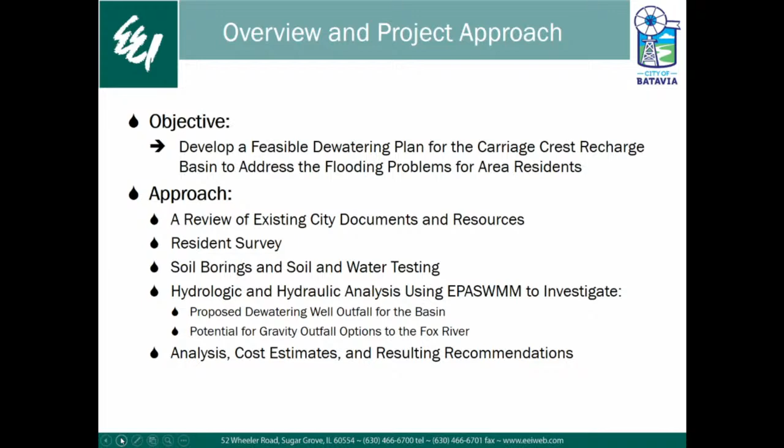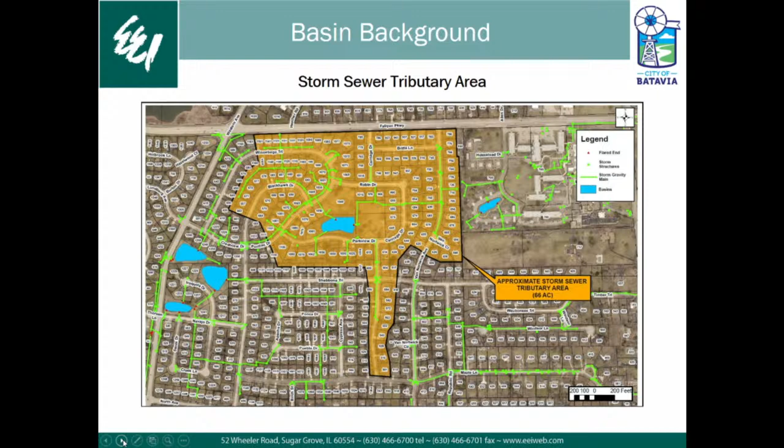A little background on the basin that we learned through the investigation and with the assistance of city staff: there are sand and gravel layers underlying the basin and also within the surrounding soils. The basin was constructed over a former dump site, and there was evidence that there was gravel mining prior to its use as a dump.

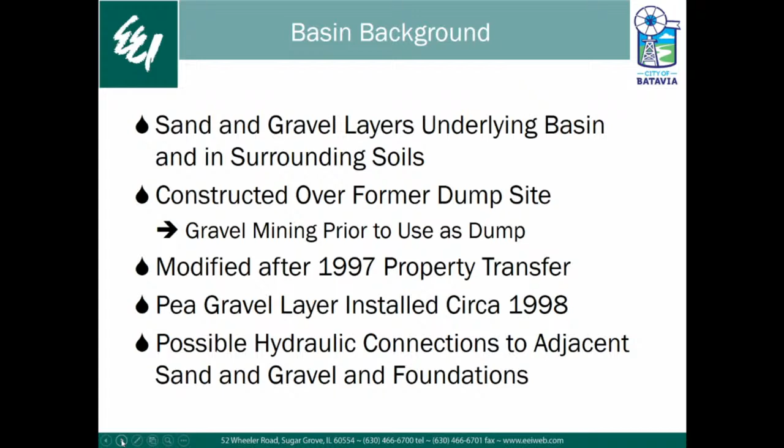The basin was modified after a property transfer in 1997, where an additional lot was added to the subdivision. Then around 1998, after the 1996 storm events, there was a recommendation to add a pea gravel layer just under the surface of the bottom of the basin to help promote infiltration. We've also learned there are possible hydraulic connections to the adjacent sand and gravel layers, and possibly also to foundations and basements.

We took two borings, one in the bottom of the basin, where there was water about 2 feet deep just under the pea gravel layer, indicating possible permeability issues with the dump material underneath it. The other boring, just outside the basin at a possible lift station location, had a thinner layer of dump material and then sand and gravel, but no water. So there's a possibility of some perched water table in the basin area.

For reference, from the plans and survey information, there are a few homes adjacent to the basin, and what we think is the lowest basement floor elevation is about the same elevation as the bottom of the basin. So if there is some connection between the pea gravel and the sand and gravel layers, there could also be a connection to some of the foundations.

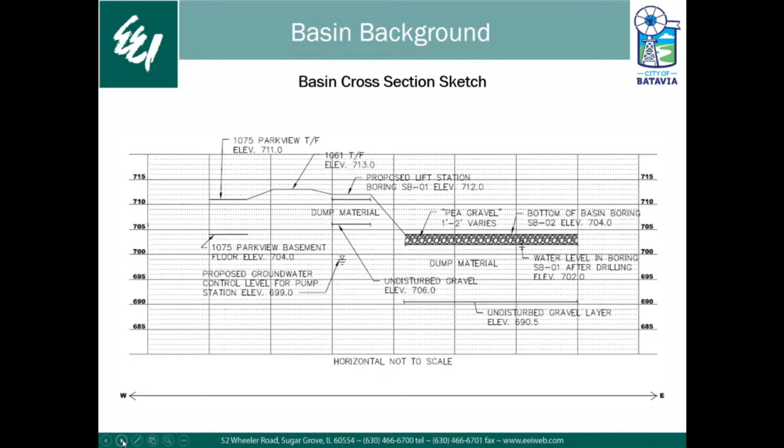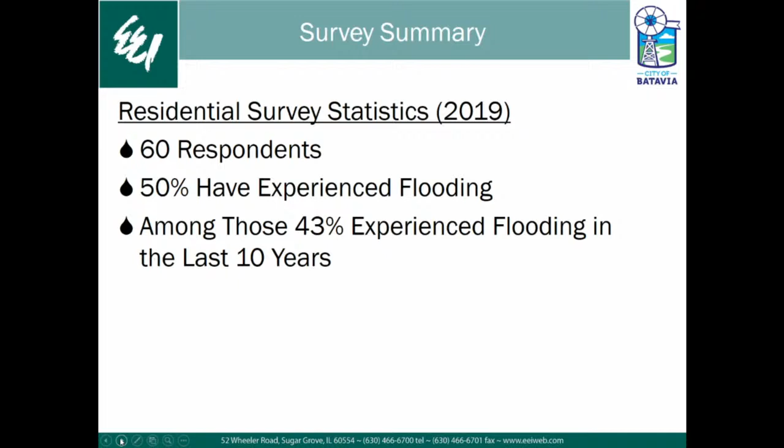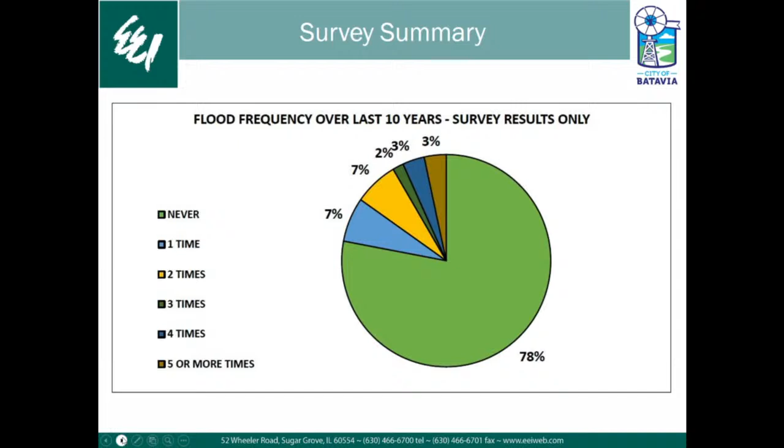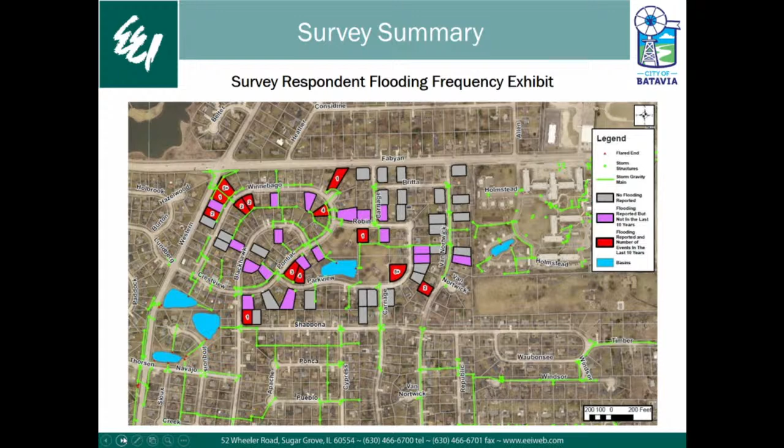Now I'd like to talk about the soil borings we did. We conducted two soil borings, one in the bottom of the basin, in the middle of it, and one where we propose a good location for a lift station if we're pumping stormwater.

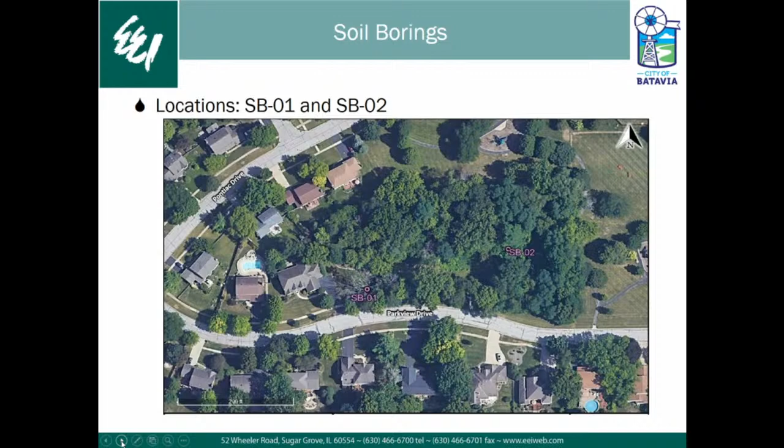Soil boring SB01 was outside of the basin, at the proposed lift station site. Underneath the topsoil there was about 6 feet of dump material, then sand and gravel material. The soils report calls that material suitable for a foundation to locate the lift station, and there was no water in that boring.

The second boring, in the bottom of the basin, found dump material to a depth of 13 feet, with the pea gravel layer just below the surface. We had water at 2 feet below the surface in the boring hole, and underlying that was the sand and gravel layer again.

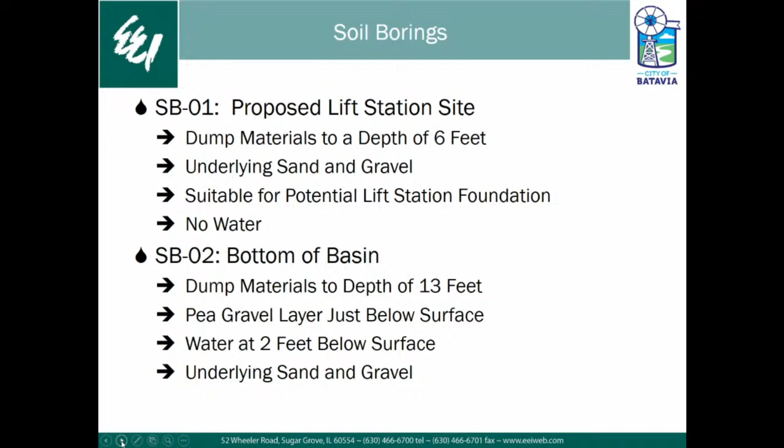A few things we gathered from the soil borings and testing: there's a varying thickness of the dump materials, which I think filled in an old excavation or ravine. In the middle it's a much thicker layer, and as you go up the sides and outside of the basin, the dump material layer gets thinner, but there is sand and gravel below the entire site and surrounding area. The soils there would be suitable if we wanted to construct a pump station. For groundwater issues, we found groundwater in the boring in the middle of the basin, indicating the possibility of a perched water table within the former dump site.

There's unknown permeability of those soils, but given that the water table at that boring site was at a higher elevation than the bottom of the boring at the lift station site, and there was no water in the lift station boring, this gives us reason to believe that water can get through that pea gravel layer and maybe even move laterally, but is not moving through the basin's underlying soils at the former dump site as quickly. That's a possible explanation for why groundwater levels respond so quickly to rainfall events.

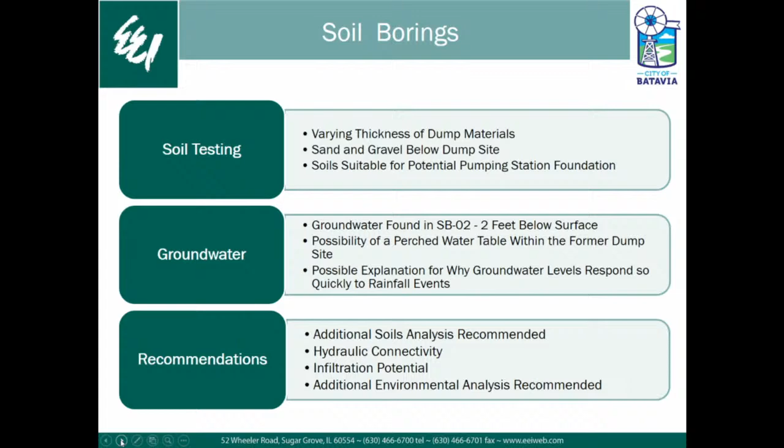And then, because of the nature of the dump site, additional environmental analysis would be needed to do pumping of the stormwater.

So then we conducted a hydrologic and hydraulic analysis. We built an existing condition model from information provided by the city for the storm sewers, from existing plans and record drawings, and created a storage curve for the detention basin based on information from the city and the 2-foot topography and GIS. We had some common assumptions on land cover for a residential area, confirming that with aerial photos, percent imperviousness, and the various soil types to try to capture how much infiltration there was in the watershed. For the rainfall data, we started this in the fall and winter using the Bulletin 70 information.

But in April, the Water Survey released Bulletin 75, which is their updated rainfall information. So we confirmed our results on some of the model runs we were using for our lift station analysis with that rainfall data.

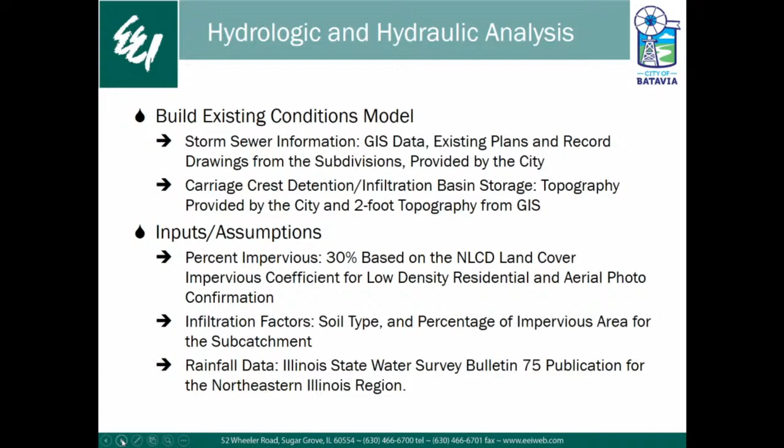So for the existing condition model, we broke that watershed into sub-watersheds. It's not a highly detailed model, but it breaks main line sections into sub-watersheds to get the water into the storm sewer, and then routes that water into the basin. From the basin, there was no outlet, but we assumed storage underneath the ground level for water and infiltration.

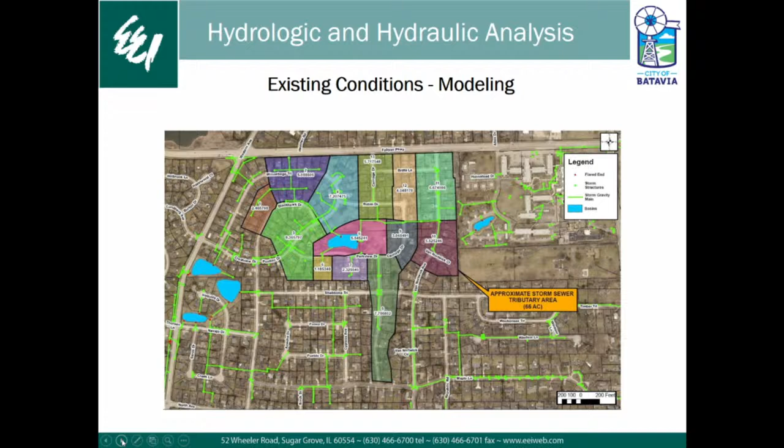We ran a series of design storms from the 2-year to the 100-year, from the 1-hour to the 24-hour, and had a critical duration. The critical duration is the event that produces the highest flow for any return period. So the 6-hour duration was the critical duration.

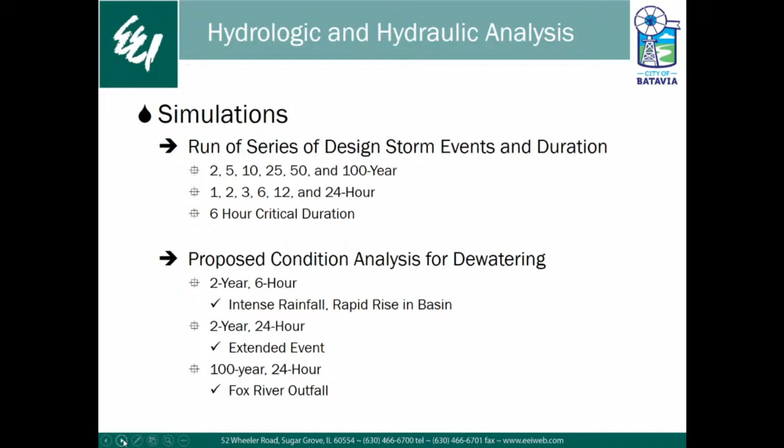So moving forward with our proposed condition analysis, we used that 6-hour event and also the 24-hour event, which is kind of a stormwater industry standard modeling event. The 2-year 6-hour is an intense rainfall where you'd see a rapid rise in the basin, and the 2-year 24-hour is a more extended day-long event with less intense rainfall but a similar volume. We also ran the 100-year 24-hour when looking at potentially sizing a gravity outfall to the Fox River.

So we set some design parameters for a potential pumping station. We set proposed invert of the drain tiles based on a previous study that estimated the normal groundwater level, trying not to pump stormwater but also not groundwater. We proposed most of the under drain along the west and north side of the basin to bring water to the pumping station—that seems to be the direction of groundwater flow in most of the problem areas, but that would be worked out in a final design.

Installation of a drain tile would be connected to the gravel layer to make sure we get that water to the pump station and not have it move off to the side in the gravel layer. For an outfall, we looked at a force main to the existing storm sewer on Crestview outside of the basin watershed, going to a different location rather than back to this infiltration basin. Another option we looked at is a force main all the way to the basin south of Crestview near Western. And finally, we looked at a gravity storm sewer option to the Fox River.

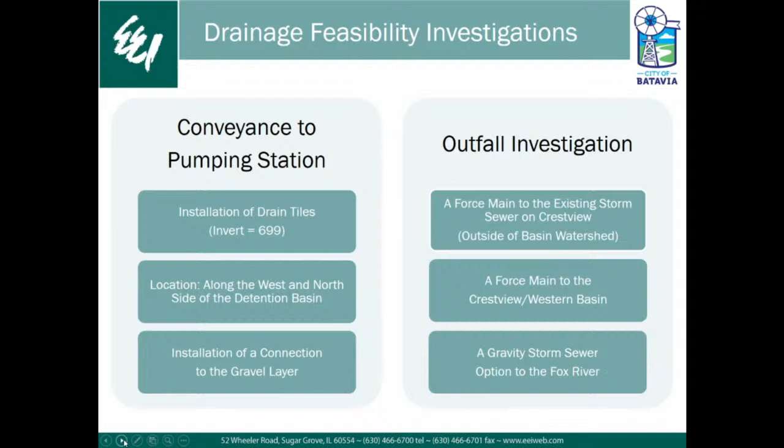So our existing conditions, as we've mentioned, it's an infiltration only outlet. The basin level rises quickly, and there's a long drawdown period.

So then the first alternate we were looking at was a pump station with an outfall to the existing storm sewer. A design consideration for that was the capacity of the existing storm sewer. We determined to use a capacity of 1.2 CFS, 538 gallons per minute, based on the gravity capacity of that storm sewer.

There will usually be a delay in the pumping, but there will be times when there's some water contributing from a current rainfall event at the time the pumps start pumping, so we wanted capacity in that storm sewer without restricting flow into it. So we just used the gravity outfall capacity of that storm sewer.

And then we're also going to look at time to draw down and level of protection in terms of storm event, like the 2-year event.

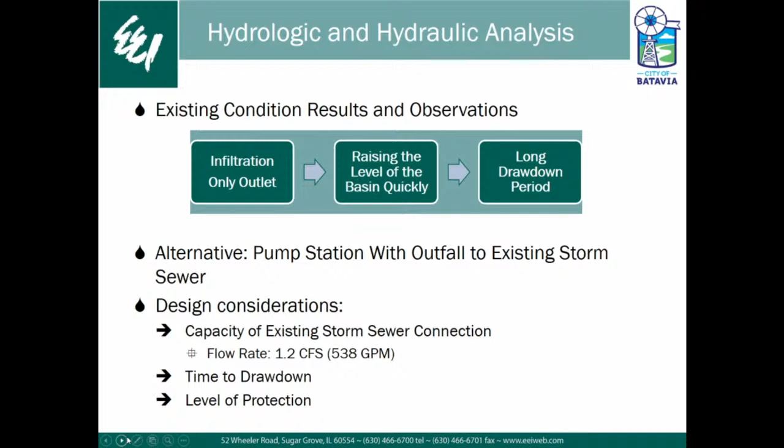So we sized the pump and force main based on that setup, as I mentioned before, with drain tile inverts at 699, the pumping capacity, and the storm sewer connection, and looked at both a 6 and 8 inch force main.

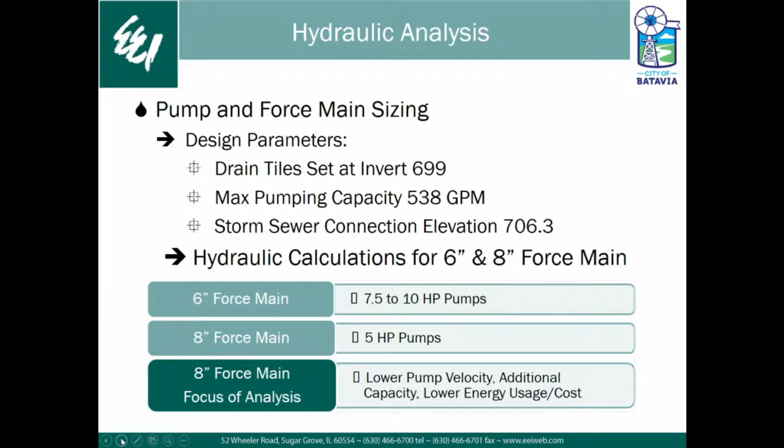The 6 inch force main had 7.5 to 10 horsepower pumps, and the 8 inch force main had 5 horsepower pumps. So for the focus of the analysis and the cost estimates, we went with the 8 inch force main: lower pump velocity, additional capacity, and potentially lower energy usage costs. That was our first alternative, using that 8 inch force main and pump station.

And the results when we run that with the pumped outlet: you have a slower rise in the level of the basin, and a reduced drawdown period, so you're drawing down the basin quicker. In that 2-year, 6-hour event, the model shows the peak elevation was 706.75, which, if you recall that sketch at the beginning, the bottom of the basin is 704. So just under 3 feet, 2.75 feet above the basin bottom. The time to draw that down back to 704 was 22 hours.

The significance of the 704 elevation is that's when water appears on the surface of the basin, and that's roughly the elevation we're estimating the lowest adjacent basement floors are at. So we set that as our level of protection target; we want to keep the water from rising above the 704 elevation. Using that existing storm sewer, we weren't able to provide that, so this is a less than 2-year level of protection system.

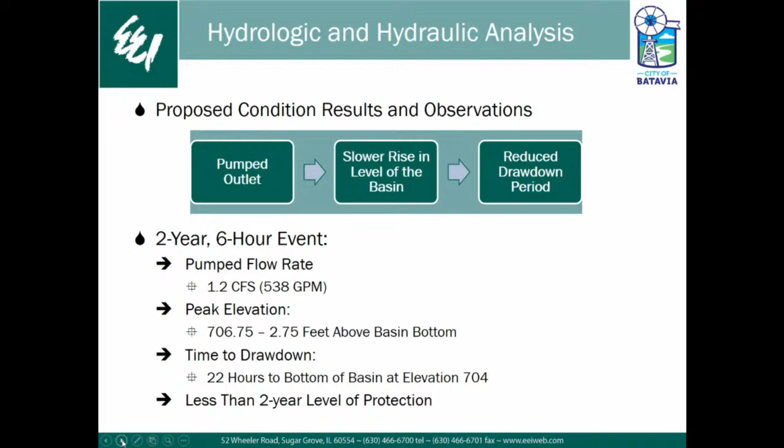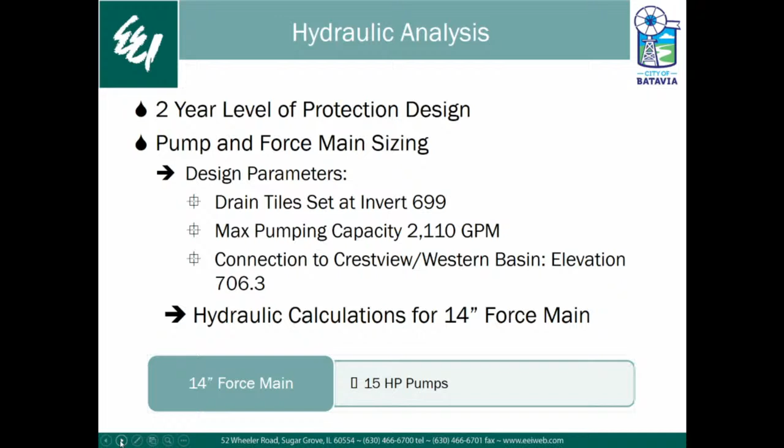That was our first effort, and then we wanted to look at what it would take to achieve a 2-year level of protection or higher. So we looked at a pump and force main sizing set, instead of at the capacity of the storm sewer, set at getting the 2-year critical duration event to not come up above the bottom of the basin. For that, we needed just over 2,100 gallons per minute pumping capacity, and a 14-inch force main with 15 horsepower pumps, all the way to that downstream basin.

And this would give a 2-year level of protection. You have the peak water level at or below the bottom of the basin in the 2-year events.

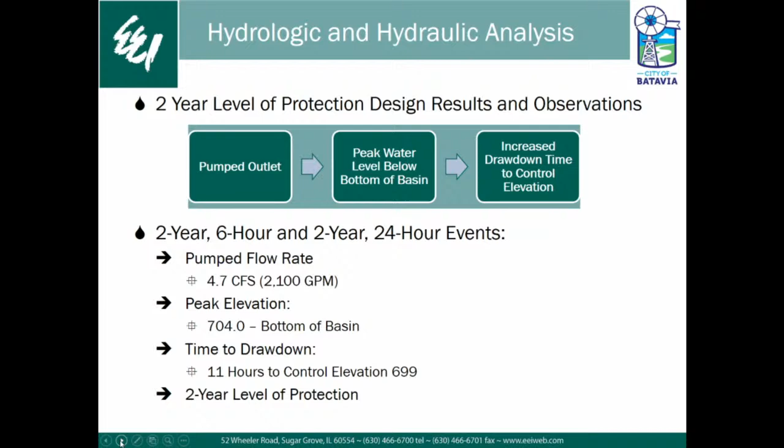Increased drawdown means a quicker drawdown time to the control elevation where we have our drain tile set. At this peak elevation at the bottom of the basin, time to draw down all the way to our groundwater control elevation is 11 hours, and we would achieve a 2-year event level of protection at that 704 bottom of basin elevation.

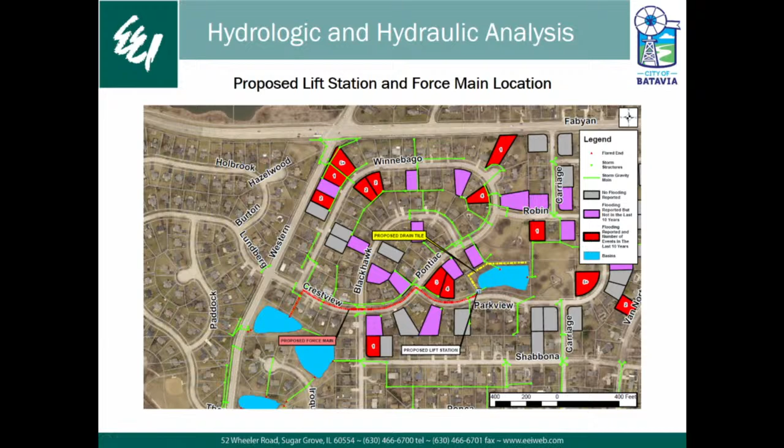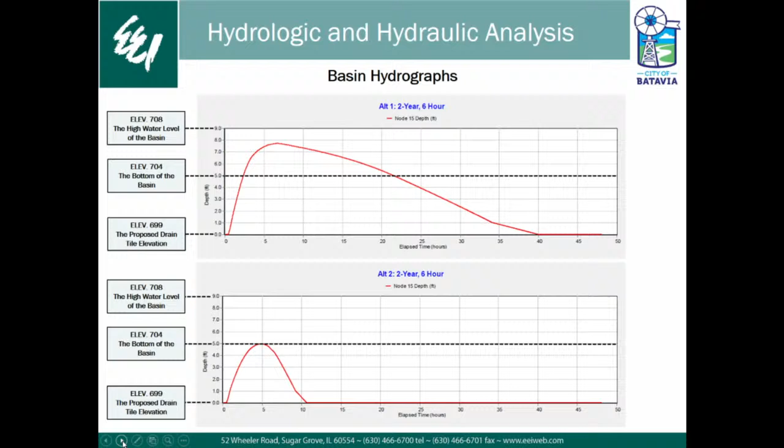We didn't go any farther with the pump station analysis because at the 14-inch force main, we're getting to a practical and feasible limit of what you can accomplish with a stormwater pumping station in this kind of situation. So in discussion with city staff, we thought to look for what possible options exist for a gravity outfall, and that would be to the Fox River.

In this case, we have a design parameter of setting a basin invert down at 700. We'd have to excavate out the basin and line it so that we could take advantage of that full 8 feet of storage without overflowing the basin, and have a storm sewer we could construct that would then take the 100-year flow to the Fox River.

We would have to line the basin to make sure we're containing the water within the basin and not allowing it to move laterally into the sand and gravel layers adjacent, because we wouldn't want that kind of investment and then not be sure that your water would stay contained where you want it to be heading.

Unfortunately, looking at the existing storm sewers downstream, the elevations wouldn't allow us to connect to any of the existing storm sewers. It would possibly run parallel to the existing storm sewer downstream, or combine with an existing storm sewer. It would be 24-inch and 48-inch storm sewer sizing in the model for a concept design.

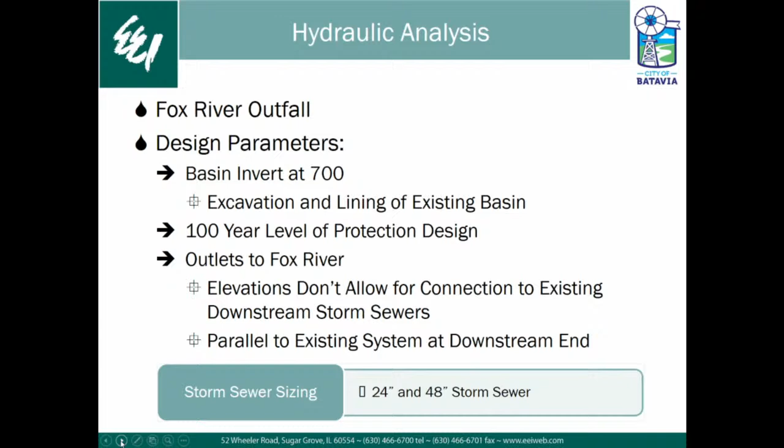So with the gravity outlet, we can contain the 100-year event within the basin. And with the excavation and basin lining, it would remove possible connection to sand and gravel layers. You'd have a peak release of 15.93, top elevation of 708, and that's when the basin is basically completely full.

If you're familiar with it, on the east end there's a walkway or a little bridge over a culvert, so it would be right up to that level, about 708, the top of the basin. The time to draw down would be 27 hours, and that would provide a 100-year event level of protection.

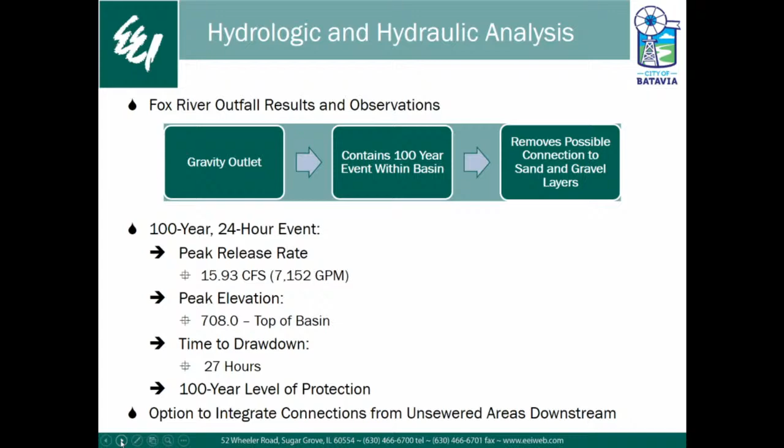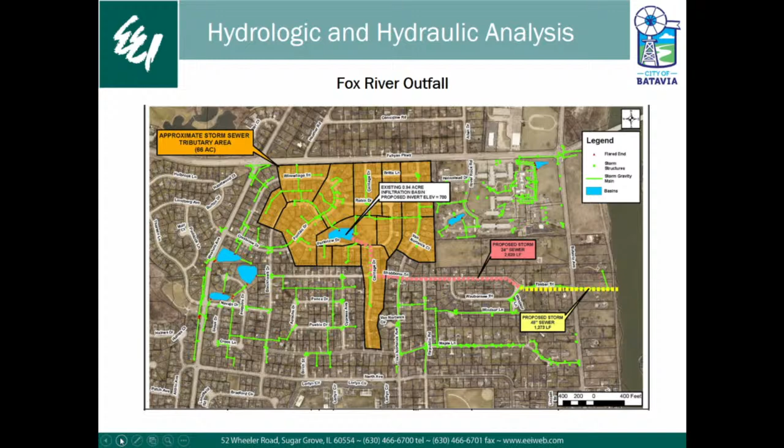There'd also be the option to integrate connections into some downstream areas that don't have storm sewers. As you can see on this exhibit, we'd have the gravity outfall as a 24-inch storm sewer, and along Chavanaugh here, where there are no storm sewers, you could provide some drainage benefits to that area. Then you connect to a large storm sewer here, and you could either run a parallel line or a combined new line down to the Fox River. That would provide your gravity outlet and your 100-year design protection.

So just to briefly do some comparison, the existing modeled 2-year elevation has the basin full. This is without pumping. I know in the existing condition, the city has some temporary portable pumping they do when there's water in the basin.

With the pumping station to the existing storm sewer, we limit that and improve the drawdown time. With the pumping station to the downstream basin, we can get a 2-year level of protection estimated based on the model, having the water not come up above the ground.

And then with the Fox River outfall, we did the 2-year and the 100-year 24-hour events. For the 100-year event, you'd have the basin full and the water releasing to the storm sewer, or to the river through the storm sewer.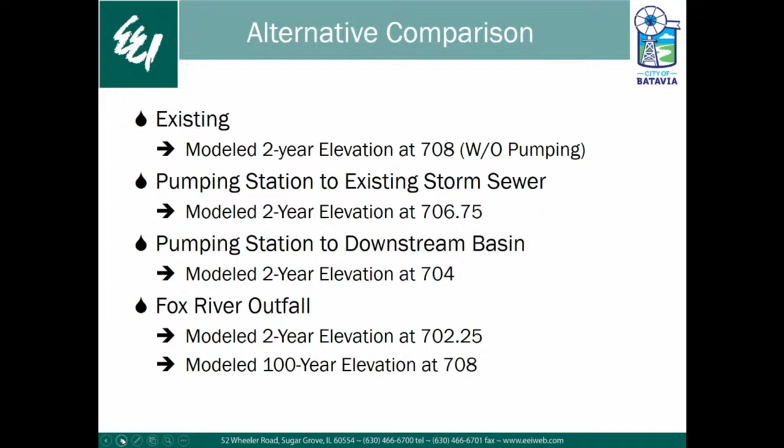But I did want to share this with you, an exhibit of potential flooding depths.

So in the basin, there are some areas on the topo a little below 704. The yellow areas are those areas. The green areas are between 704 and 706, so that's when you have 2 feet of water in the bottom of the basin, and you see the basin footprint is full.

There are some low areas in the park that might start to show ponding water. By the time you get the basin full at 708, the red area is elevations between 706 and 708. So by the time the basin is full, you'll have potentially ponding water throughout the park site, in some rear yards, and in the roadway from the surcharging of the storm sewer.

So you would still have that happening even with the gravity outfall, but it would be for a very short period of time during only the very largest events. Whereas currently, the 2-foot topo doesn't always pick up the lowest spots.

There'll be inlets in these rear yards that may be a little lower than the topo is suggesting. So that's why when you get a couple of feet of water in the basin, people start to see water coming up in the backyards, and the streets aren't able to drain because of the surcharging impact of the way the basin is set up, as the water level rises relative to the elevations of the storm sewers.

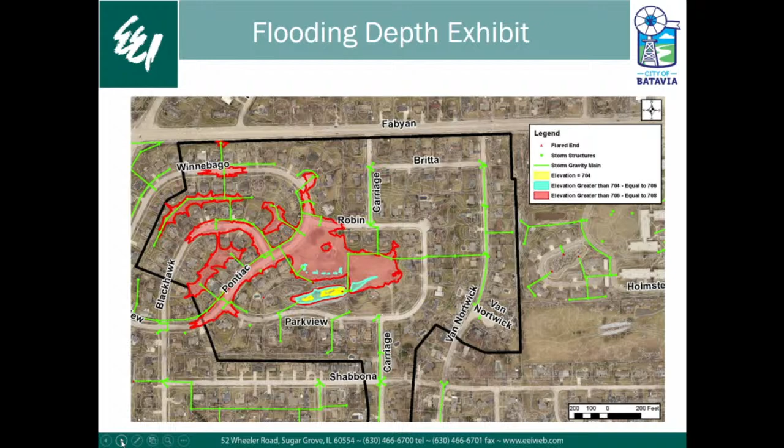So this is a summary table with our concept cost estimates. The lift station force main to the existing storm sewer, with less than a 2-year event, our concept estimate for that is $604,500. With the larger force main all the way to Crestview, with 2-year event protection, the concept estimate is $879,000. And then the estimate for the outfall storm sewer to the Fox River is just over $3 million.

That would include excavation and lining of the basin and construction of the storm sewer.

Tim, yes, this is Andrea. Can you just clarify these costs as to whether or not the design engineering and construction engineering are included in those numbers or not, so everyone is aware?

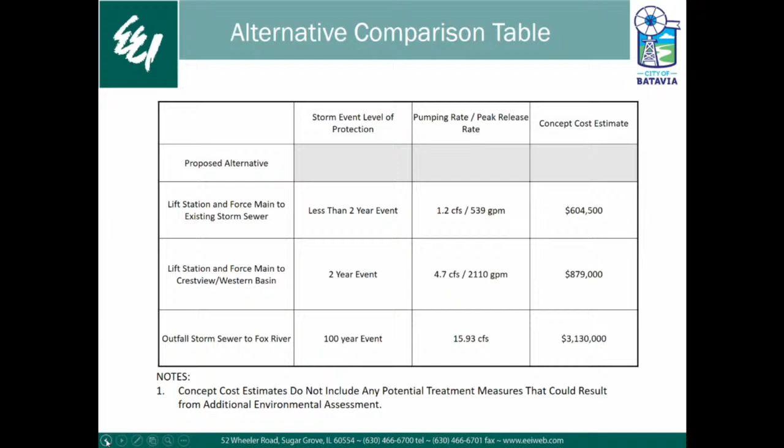Yes, that includes the design and construction engineering, and I believe it's a 10% contingency on the cost estimates.

So I just wanted to reference the May 2020 event, which we're all familiar with, because that event happened as we were just wrapping things up, but it made a lot of things make sense with what we were seeing with the soils. We did some rework based on that, and I think we learned quite a bit about how things function, or potentially function, with that event.

So these are observations at the official records at O'Hare for those two days, May 14th and 17th, over 3 inches of rainfall. They're both very close to a 2-year, 24-hour rainfall event, which is 3.34 inches in the new Bulletin 75 State Water Survey publication. And then that 5-day period at 8.2 inches was a 25-year, 120-hour event, almost exactly a 25-year event.

So in that case, just looking at the way the basin was modeled, this would estimate that with the spacing between the two events, our drawdown time of 11 hours on a 2-year, 24-hour event, a 2-year, 6-hour event...

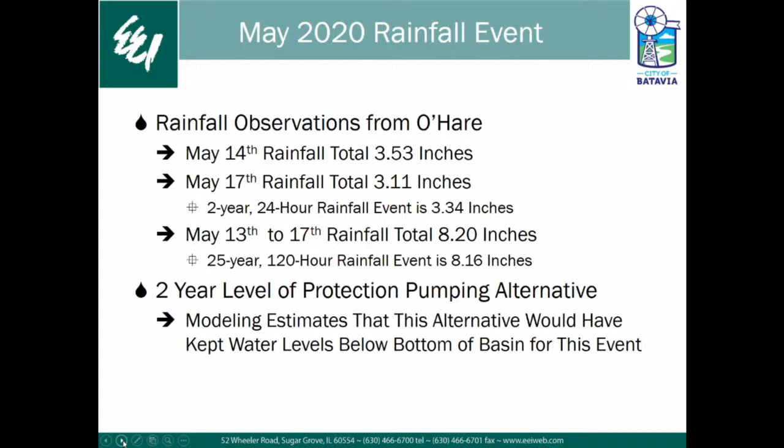So we were estimating that that alternative, the 2-year protection pumping alternative, could have kept the water levels below the bottom of the basin for that series of events in May.

There are also some possible other mitigation options to consider, either in conjunction with the pump station or standalone. Some residents' sump pumps discharge directly back into the basin, and it's possible to find a way to reroute those to prevent that from recirculating.

Possibly a force main system that would allow connections so that the sump pumps that are pumping water could tie into the force main as well as the city's pump, instead of having residents pumping water into the basin to be pumped by the city's pump to the force main. So that's a possible option to look at if design moves forward with the pumping station.

And then other options would be to look at a possible liner or cutoff wall across that gravel seam or another connection, specifically along the west side of the basin, if that's determined to be a significant factor, with additional investigation.

Another idea would be to look at increasing the infiltration capacity of the basin, possibly with dry wells or other connections of that pea gravel layer into the underlying soils, to help it move down instead of laterally.

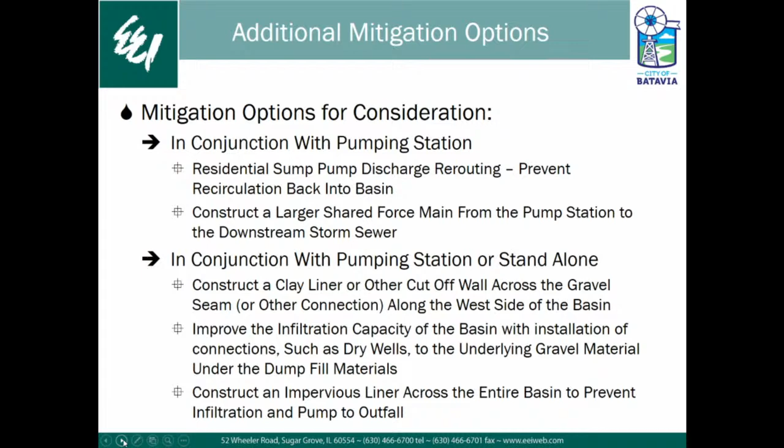So in conclusion, we studied the Fox River outfall. It's significantly more expensive than pumping, but it would be more effective and reliable in the most severe storm events. Additional mitigation measures should be considered no matter what goes forward, because even with the pumping scenario, you're going to want to look at those hydraulic connections that may exist to the surrounding groundwater table, and potentially then to some of the basements.

Recommendations would be to do a comprehensive analysis of the soil and groundwater conditions to get a better understanding of the recharge characteristics and infiltration capacities of the basin, how they could be amplified if possible, and then to identify connections to the sand and gravel layer and foundations so that they can be effectively designed to cut off those connections.

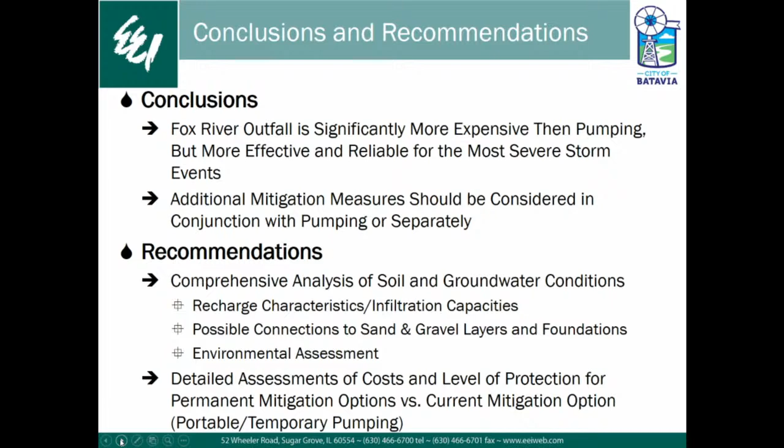And then a full environmental assessment, so you know what kind of permitting issues there might be with pumping stormwater from the dump site. Once you have that, you can do a more detailed assessment of the costs and level of protection for any of the permanent mitigation options versus the current option of portable temporary pumping. You could have better confidence going forward with one of the design options, having eliminated the possibility of those connections, and a better ability to compare the cost once you know what it would take to eliminate those.

And with that, I'm open to questions. Okay, does anybody have any questions?

Alan, I got one. When you were talking about running the storm sewer down Shabbona Trail to the river, would that be a big enough pipe there if there's one area that potentially could be adding some additional opportunity for development? It's on that picture there, right next to that yellow box. It's the backyard of the novitiate on North Batavia Avenue, and there's a very large area back there that's undeveloped. I've had different people in here over the years talking to me about doing things on that. It would be a residential use, obviously.

Can you use the mic, please? Oh, it'd be a residential use, but it would be adjacent to that pipe. So I just wonder, would it be easy to drop that sewer from that area into that pipe? It wouldn't be impacting these folks because it would be to the east of where they are.

That's not something that we looked at. We just modeled the sizing for the outfall out of the basin, but that's something that could be looked at. It might impact slightly the size of the storm sewer required, and the cost.

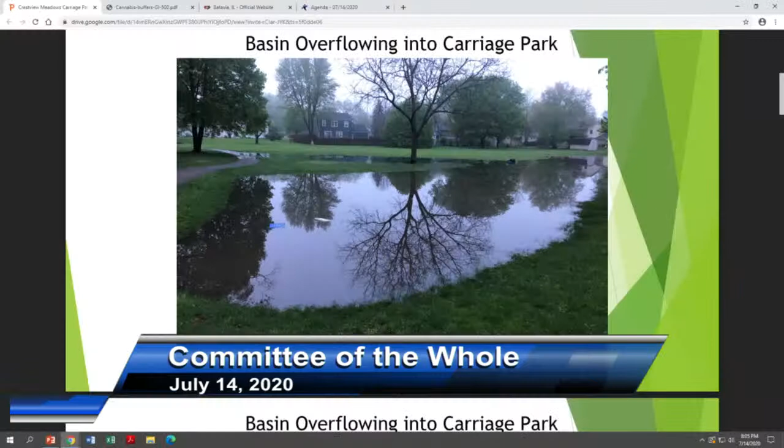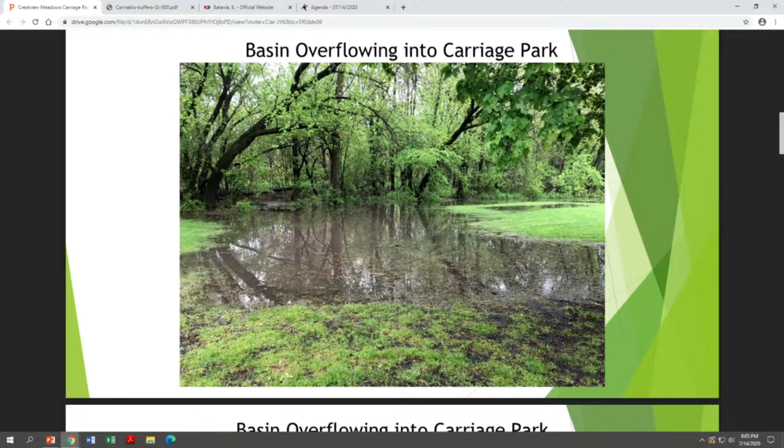What's really concerning about this is we've got a basin that fills up, overflows into a park, and it's built over an old dump. So stormwater by nature is contaminated, and all that water then goes into the grassy area. It reaches out with multiple fingers into different areas, and it also sits right in the playground area.

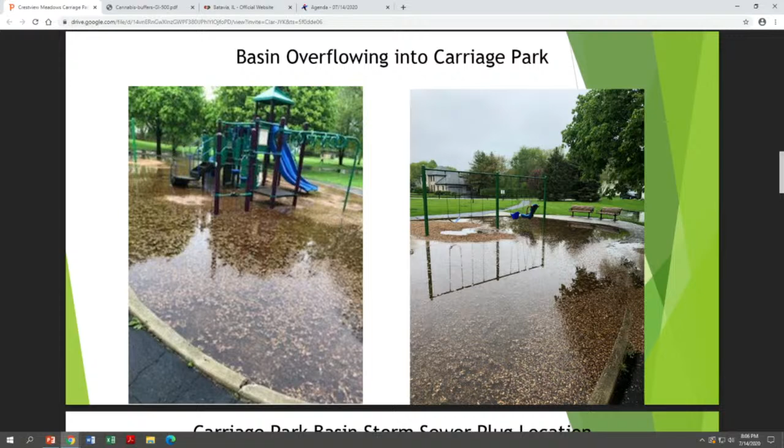As a resident with small children, 10 and 8, I can tell you my kids love this park. They love the woods where the basin is, but we've had a lot of questions, and we've changed the criteria for what they're allowed to do now because of the dynamics of that park. We also keep them away when the water's at this level, but as PJ mentioned, this is every year now. Last year it happened a couple times. This year we're fortunate, it hasn't happened as many, but the magnitude of this recent event certainly hit home and allowed for these pictures to be taken. This is what we're living through in our park. Dogs, kids, adults, we enjoy it, we love it, but under these circumstances we can't even go near it.

The plug was brought up by EI, and I appreciate that, Tim. The plug is an interesting concept because in most counties, you're not allowed to plug a sewer line. I know for a fact in DuPage, the guidelines specifically say you cannot restrict the flow to zero. We all understand that it has to be done to protect us from the marsh, and the green box is roughly where that plug goes typically, so that the marsh and anything west of us doesn't back up like it did in 96.

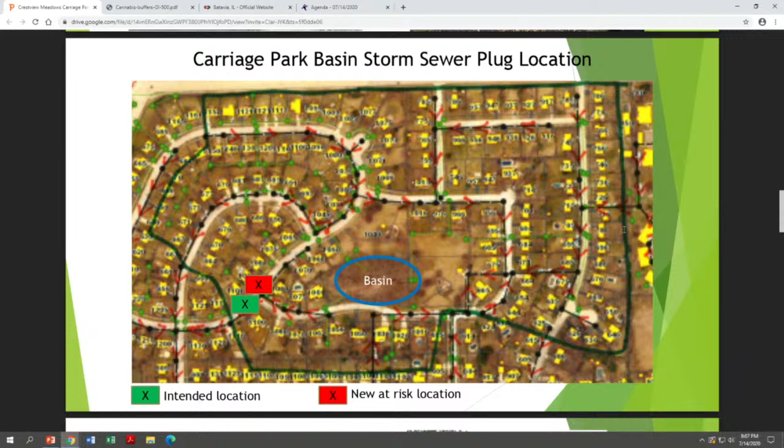So we accept that, and then we all flow into the basin. But what happens is when the basin's full and the city has to come out and pump to help PJ and others, they move that plug. This past May, for that 5-day event, whatever 25-year storm it was, that plug was never in its intended location. So as a resident concerned about the marsh backing up, concerned about our basin filling up, we didn't even have the plug in the right spot.

Now you'll see over the next slide, when the plug is moved to allow the city to pump, which we understand why they need to, this is what we live through at that intersection. The entire intersection's full, it's reaching up into the parkway, our backyards are full. This is the mess we're dealing with when our basin fills, along with the park being filled and properties taking on water. There's many here that represent, once again, the water issue.

Our properties are forced to hold the water. Our sump pump systems are pushed to their capacity, either going off continuously or at very high rates. I can tell you mine was going off 3 to 4 times a minute, which equates to over 4,000 cycles per day for almost a week. The stress, the anxiety, what we live with under those circumstances — I can tell you I don't sleep well.

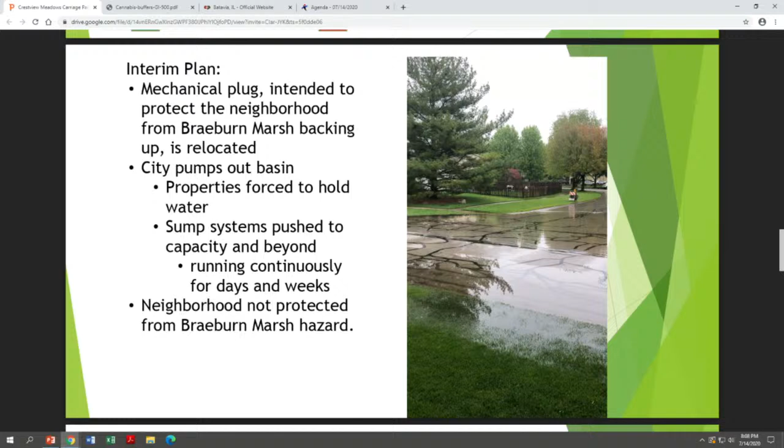Many here are actually taking on water. But I've heard it too many times where individuals have said, well, your pump's running, it's fine. Okay, but under that condition, it could fail at any time. Even with a battery backup, you might have 8, 10, 12 hours of battery backup. Under those circumstances, if the power went out, you've got maybe 4, maybe 3. There aren't backup systems out there, unless you go with a house generator, that can support what we're experiencing for a lengthy period of time. We really need help.

There's a picture recently — the water's got nowhere to go. It doesn't go down into the storm sewer system, the groundwater system.

It just bubbles right up, goes right back down to your foundation. We're all living through that at a minimum, or we're taking on water.

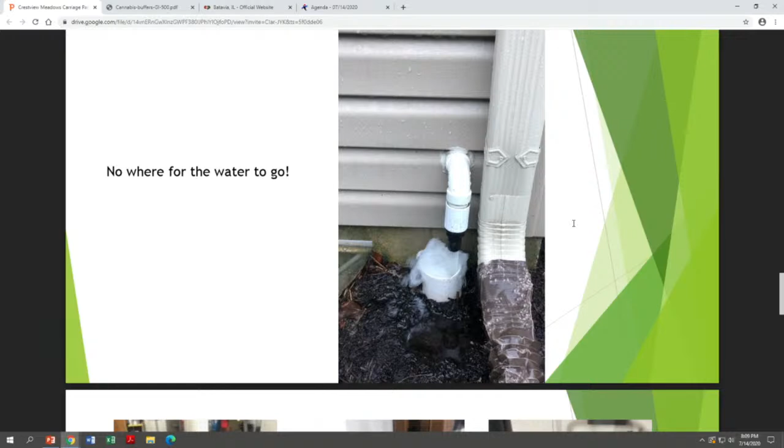This is my neighbor just across the street, the Browns, 1100 Crestview Drive. Through all the discussions with everybody who's known, everybody who's lived in that house has never taken on water. Well, under these circumstances, with the pumping, the flooding, along with the basin fill, their pump failed during this episode and took on water for the first time.

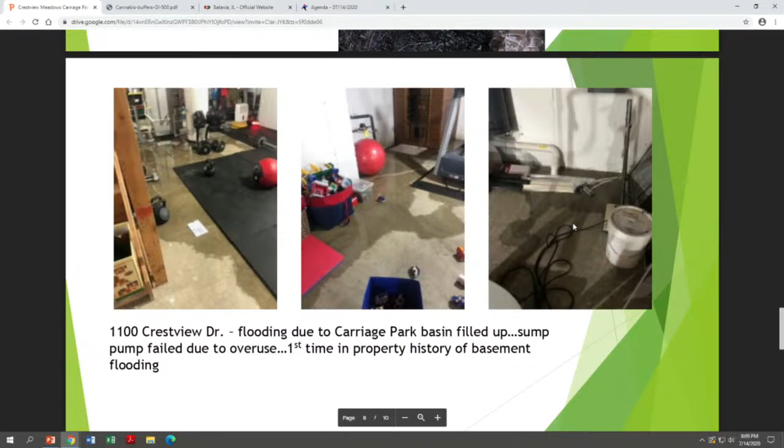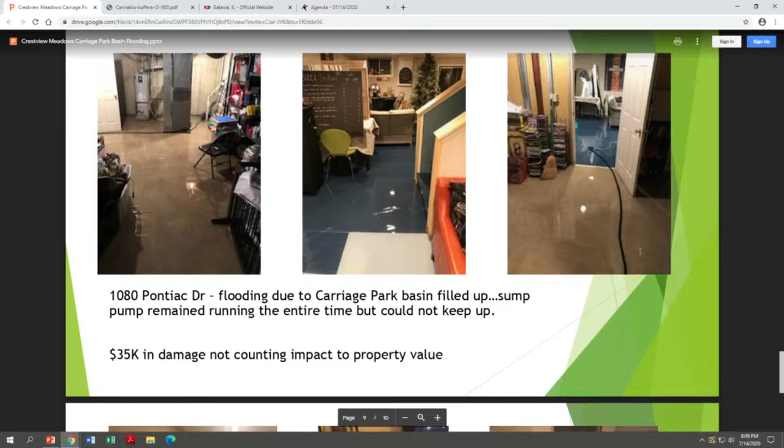Once again, neighbors, 1080 Pontiac Drive, they live right next to PJ. I have the honor of speaking for them here too. Once again, with their pumps running, they're taking on water. They've got systems in place, contingencies and backups, and they're still taking on water. As PJ said, he's got multiple systems and he still can't keep up.

So pumps running, you're living on the edge. In some cases, pumps running, you're still taking on water. We really desperately need your help, and we thank you again for listening to us tonight. Thank you.

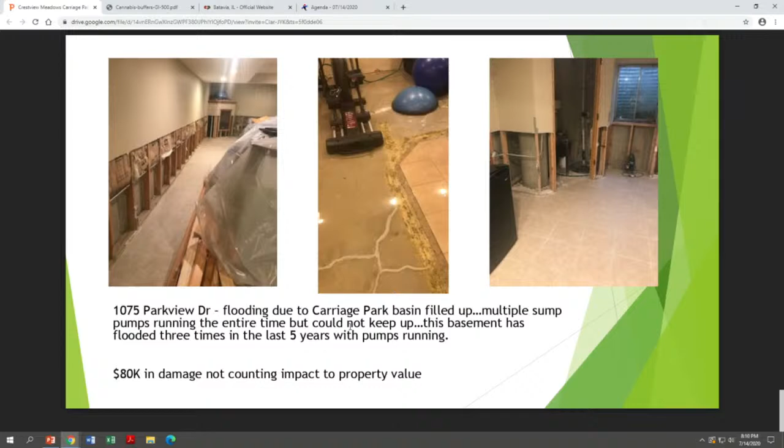I guess just to close out our presentation tonight, unless there's anybody with comments, I do want to thank Jason, Dan and Elliot have been good. I want to mention Gary who's on the line, and Andrea and Rahat are here, and Scott Haynes and Bill Kellum. Your staff has been great people to work with throughout this whole process, going back to 2008. They're out there, they're on the front lines, they're listening, and we really appreciate all their efforts to date.

So I guess to repeat our final ask: we would ask that we restore the next phases, whether it's more soil borings and getting to final design that can move forward this year once they wrap up this study, as well as, since you're getting ready to deliberate on the 2021 budget, trying to figure out a way to get some construction money into the 2021 budget so we can get this thing built and put in place a sustainable solution - the protection that the boys from EDI are talking about, and so those sleepless nights Jason talks about go away.

We thank you for your time, and I had an ask, so if there's any questions you all had before I turn it over, I'm here and willing to answer them. Thank you.

My name is Jeff Kruger. I've been here since 1988. I live at 686 Blackhawk, so I've experienced this for as long as anybody here.

And just to reinforce what's been very well said by both gentlemen, I've got 2 pumps in my main sump pit. One is rated at over 4,000 gallons per hour. It runs nonstop. And to reinforce exactly what they're saying, there is no backup system, no battery backup system, no whole house backup system that can save that.

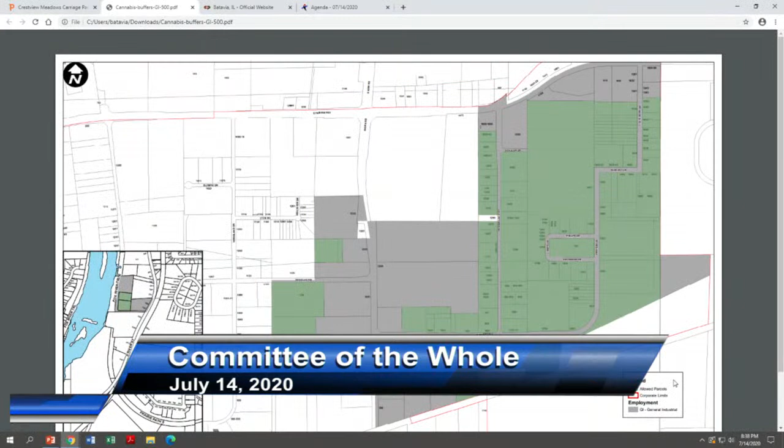Certainly. So this draft ordinance before you tonight would amend the employment districts chapter to categorize several different uses that were implemented by the state licensing acts for recreational cannabis, that are basically industrial business-related uses in terms of creating cannabis products and shipping products and so forth. With the review that the Planning Commission made, they proposed that these uses, if they are to be permitted by the city, be conditional uses only in the general industrial district, and that there be additional standards implemented for locational requirements that these businesses would have to follow.

In terms of the location requirements, what was proposed is a 500-foot setback from certain uses, and those uses were public and private schools, daycare facilities, public parks, churches, cemeteries, and residentially zoned property. Also, residentially zoned or residentially used properties that may not be zoned residential.

They also established a number of performance standards. Those include one regulating odor that basically requires that no odor be detected from these uses at the property line. The second, we do have an industrial noise standard, and the Planning Commission proposed that these businesses need to follow the noise standard that we have in place for industrial to residential.

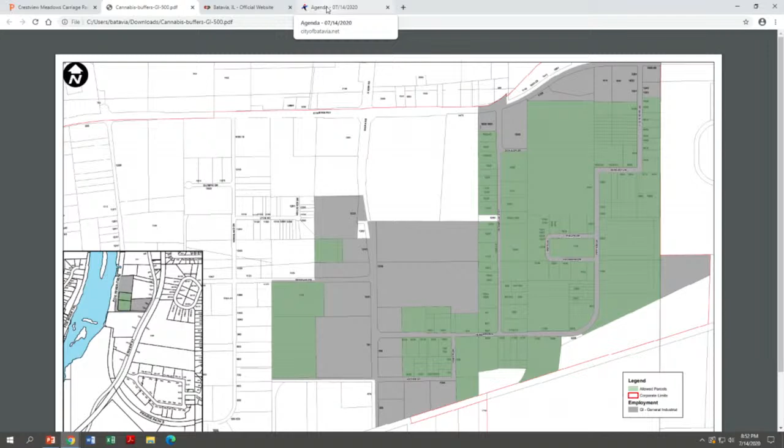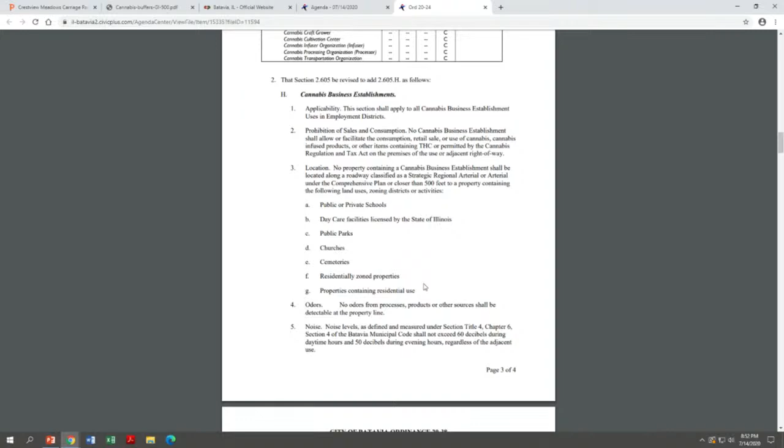This is Drew. Why are we treating this any different than the medical cultivation centers that are already permitted uses? It's all manufacturing, basically just for a different end use. I don't think we should, and that's why I think we should remove that restriction. It should go by what the state statute says as far as how far it has to be away from residential, and not over and above what area we've decided fits in the industrial district. I think we should mirror the medical, with deference to whatever the state law says.

So, Scott, can we change that and move it? You can do whatever you want. It's up to you guys as to what restrictions you want to have or not.

I don't want to hijack you here, Marty, but I think that would be an amendment I'd like to see made to the approval of this tonight to move it to council. The other thing is, yes, we're kind of waiting on what the governor is going to decide on that. We also have a referendum out there to decide other uses for cannabis in our city. I think this is something we need to get completed, so that when the governor or the legislature, whoever makes that decision at the state level, moves forward, we are ready, and people will be able to look at our properties available for this use, and not be trying to do it after the fact.

Right, and I agree with that fully. We've already been in that situation once, and I think that cost us a possibility of any type of facility for growing in the community. I think this is something where we do have a possibility of locating one or more of these facilities in our town, so I think this is something we need to get done.